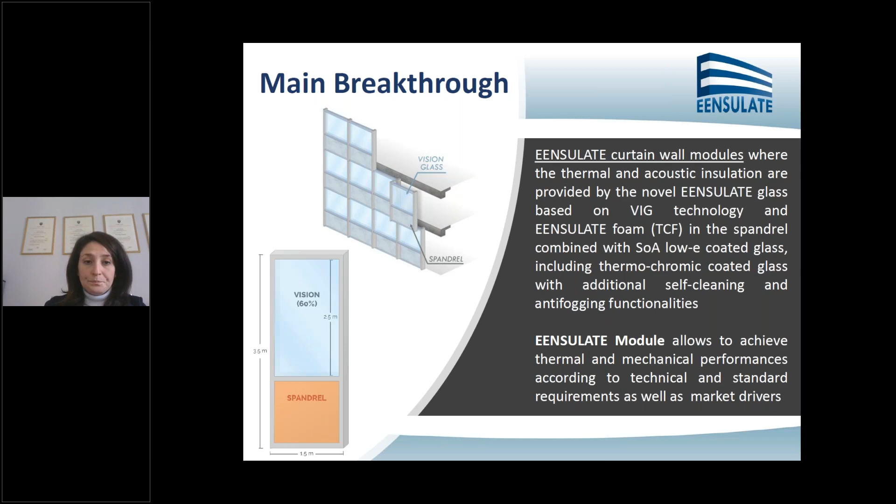Now I'm going to go a little bit more in detail concerning the technologies that we develop for producing the EENSULATE products. In particular, the vacuum insulated glass is a lightweight and thin double pane assembled thanks to the innovative sealant and getter technologies, for the transparent part of the facade, as well as for the windows application. In addition, for the spandrel part, we develop a highly insulated foam based on monocomponent and bicomponent elements.

Concerning the VIG, the vacuum insulated glasses have been developed by BGTEC, a company based in Poland, of course with the support of the rest of the consortium. BGTEC developed a tailored manufacturing process implementing both the innovative sealant and getter strips to ensure the target performances for the final product. That is a target U-value of around 0.36 to 0.44 watt per square meter Kelvin.

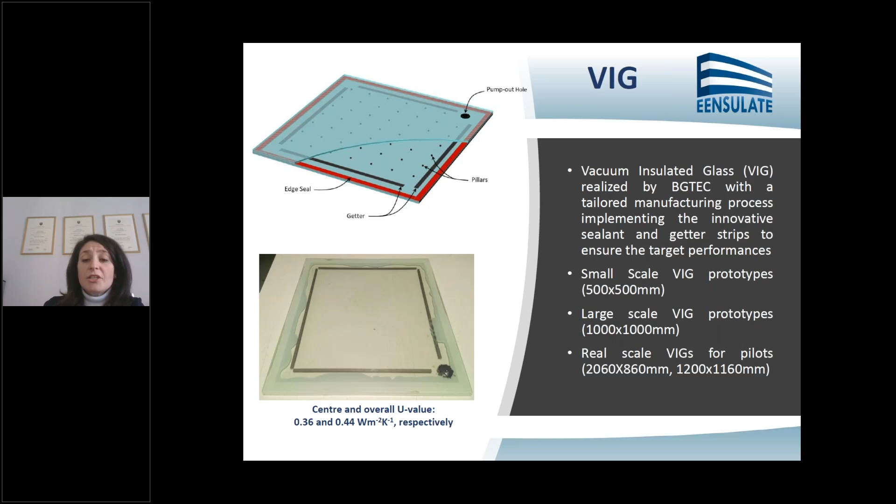During this project, we developed several small-scale VIG prototypes of 500 millimeters and also large-scale prototypes. Currently, BGTEC is assembling the latest real-scale VIG for the pilots' application.

Regarding the foam, the monocomponent foam is specifically for windows application and has a very high insulating target. And the two-component foam has a high fire class and it is tailored for spandrel application. Both of them have been developed by Selena, a partner of the EENSULATE project, and it is a Polish company. The innovative foams are based on polyurethane foams with tailored cell morphology, size and structure in order to enhance the thermal performances through the precise control of the cells' nucleation.

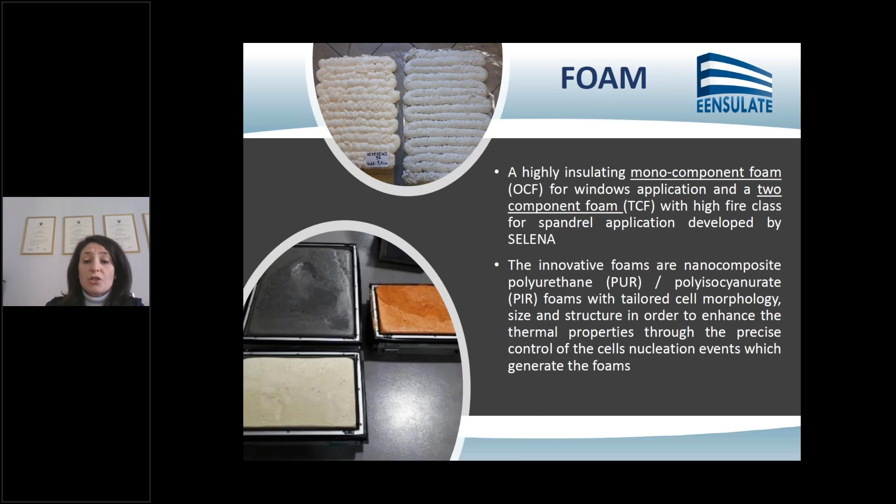Concerning the sealant, the sealant used for the assembly of the VIG system is an epoxy resin sealant, and the thermal curing allows a low process at a temperature below 200 degrees. We also have the possibility of having a monocomponent sealant resin in a syringe form, dispensable in a range of 60 to 100 degrees. The sealant has been developed by SAES, which is an Italian company.

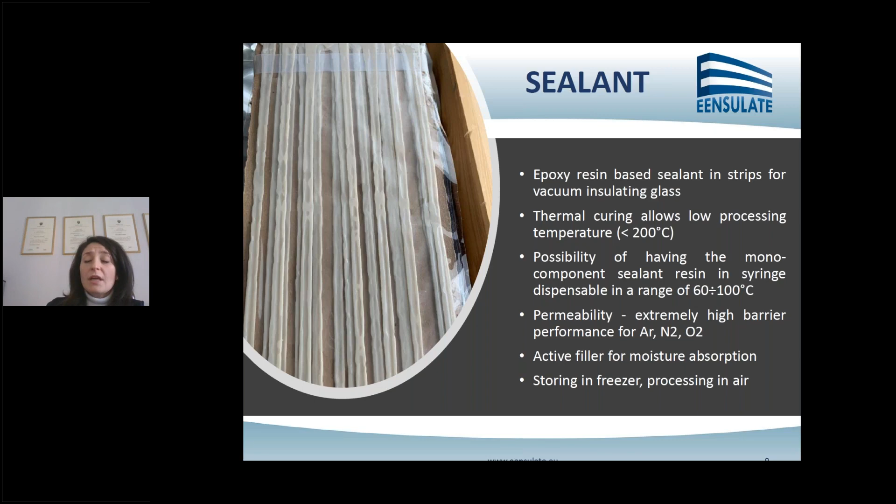This sealant has very high performance in terms of permeability, because it is an extremely high barrier for argon, nitrogen, and oxygen. It is necessary to store it in a freezer at very low temperature, but the processing can be performed in air.

Regarding the getter, it is a distributed getter realized with an innovative zirconium-based alloy with extremely high nitrogen capacity. It is very easy to be handled and positioned in air during the production process of the VIG. The getter activation is performed by radio frequency heating under vacuum pumping.

In this particular pilot, we will apply not only the VIG technology that we developed in the EENSULATE project, but also the TGU, traditional triple glazing units, in order to compare the current state of the art with the innovative solution through monitoring.

Concerning the museum, it is the second Polish pilot, based again in Dzierżoniów. It is a historical building, and for this reason we could not change all the windows, but we simply removed them and included the innovative VIG system in the same frame. This is possible simply because the VIG that we are developing is lightweight and very flexible for application in different kinds of configuration.

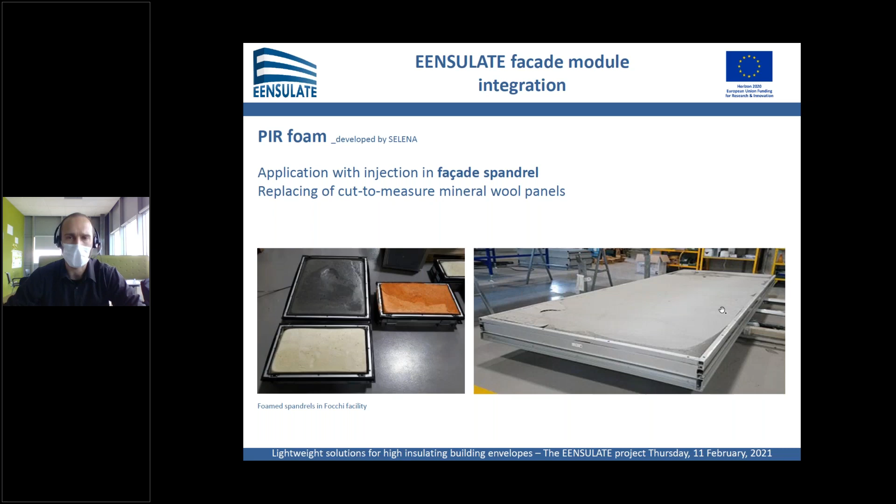Two technologies are crucial for the EENSULATE facade module. First of all, the foam. This is a PIR foam that should be applied inside the spandrel, so the opaque part of the facade, with the idea to replace the cut-to-measure mineral wool insulation that is usually used in curtain wall facades. This represented a first challenge for the project, to include this type of foam inside the spandrel. The results are interesting, and it opens some opportunities for its wider application in an industrial scenario. Some further development is obviously needed, as is normal for an innovative product, but it's a very good achievement.

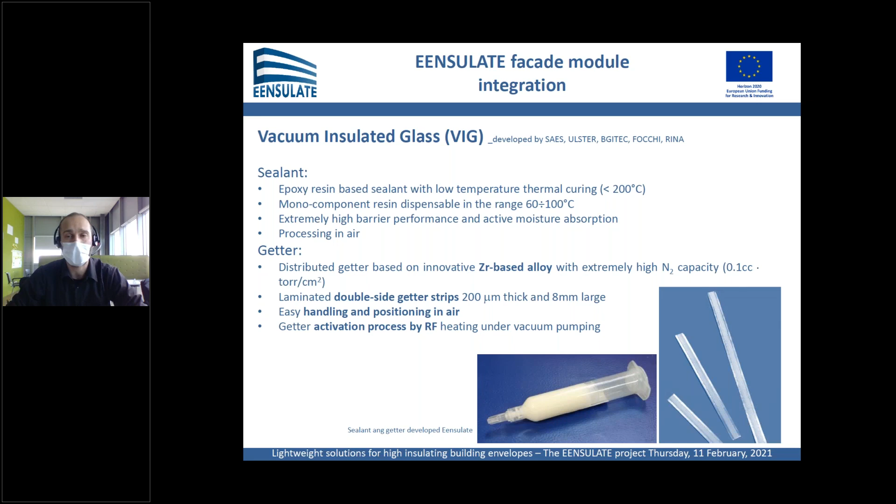The second technology is the vacuum insulated glass. As Daniela has already mentioned, it's quite innovative in the way the product is manufactured. In particular, the sealant, which can guarantee that the coating of the glass will not be damaged during the activation of the curing of the sealant. And second, the getter, the strip responsible for absorbing the air that eventually goes inside the cavity, and it achieved very good results, as we are seeing in the tests we are conducting at this very moment.

What are the final results of the VIG useful for the facade? First of all, the sealant is 2 times better than a commercial sealant for insulated glasses. It represents a very valuable moisture barrier for the glass itself, and allows the use of coatings for glass thanks to the low processing temperature. One of the main issues is how to cure this sealant while preserving the coatings that are now used for glass, and thanks to this sealant we achieved that result.

The getter, on the other side, allows for a very relevant improvement in relation to other getters on the market, achieving very high performance for the VIG in comparison to other VIG competitors, but also in comparison to one of the current benchmarks for the market, the triple glazed unit. And second and third point, we demonstrated how this glass could be laminated, so as to preserve safety for its application.

How did we integrate this solution? This was the target we wanted to achieve within the project: a new U value for the wall module of 0.7. It was designed specifically using one of the demo buildings that we expect to renovate during the project. As you can see, this is a unit of 1.2 meters by 3.6, and the overall target is quite relevant in relation to the current benchmark.

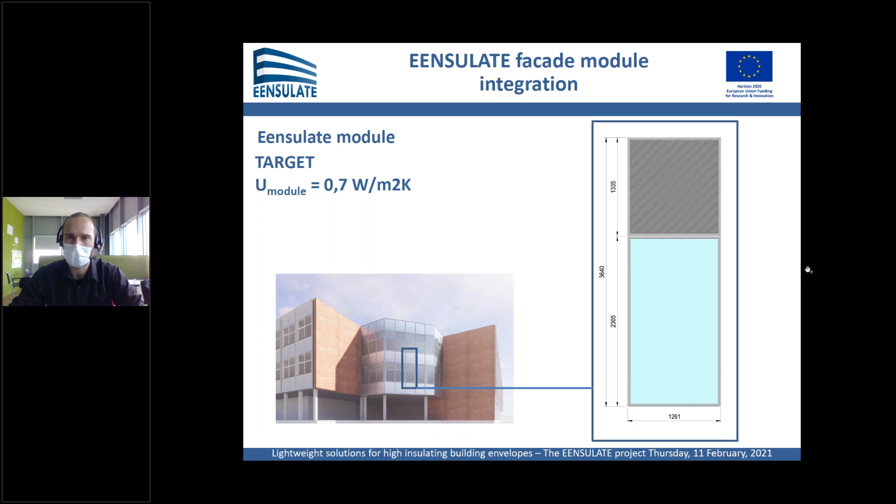What we've done: we have implemented during the whole project the integration of the VIG, trying to figure out the best solution to improve the facade design to integrate this component. In particular, one of the main issues was related to the VIG. The VIG was meant to achieve the target of 0.3 watts per square meter Kelvin for transmittance, and the foam 0.02 watts per meter Kelvin. The integration of the VIG strongly addressed the design of the profile for the facade, first of all because the sealant represents a thermal bridge for the vacuum insulated glass, so we tried to figure out which design could better achieve the result we expected for the module.

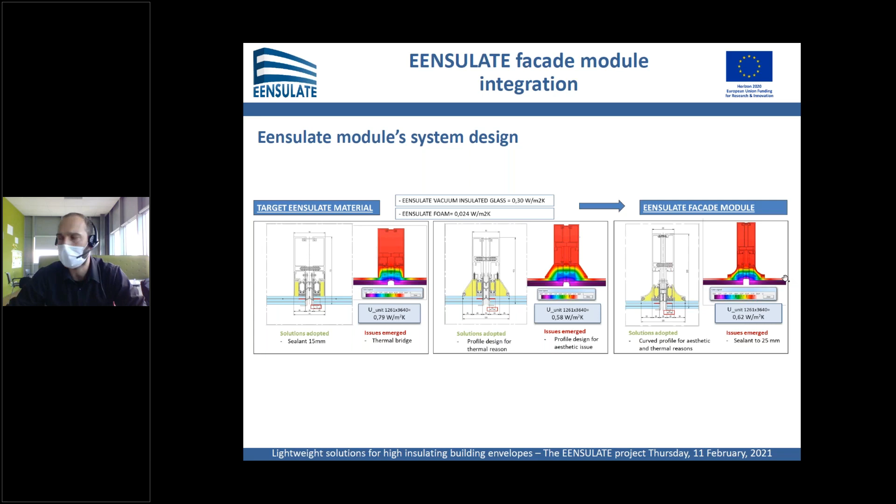The final configuration, and here you can see the implementation during the different design phases, allowed this type of solution. We finally had a sealant with 25 millimeters of thermal bridge. The getter is not relevant for the thermal bridge because it does not create any continuity between the two glass panes. We designed a curved profile to work with the isotherms of the thermal performance of the facade, and we filled this curved profile with EPS foam material to help reduce the thermal bridge, with a U value for the node of 3.1 watts per square meter Kelvin. The result is very relevant and perfectly in line with the expected target.

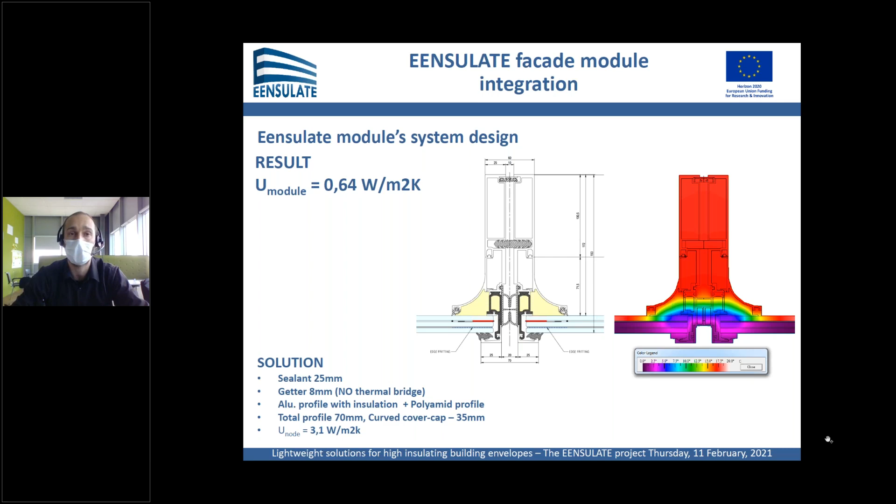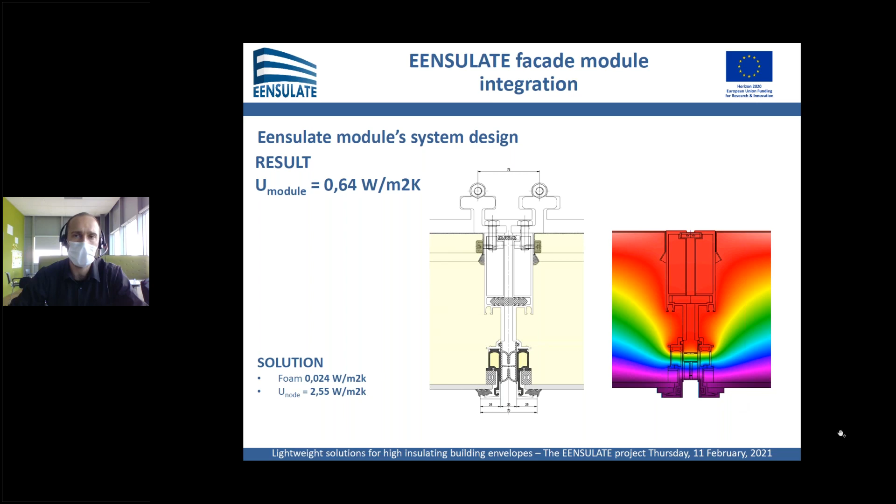So the U value for the vision part of the module was 0.64 watts per square meter Kelvin. The same considerations were adopted for the spandrel part, where we adopted the foam. The foam guarantees a very high performance in relation to mineral wool because the conductivity is better, and so this contributes to the achievement of the target of the module.

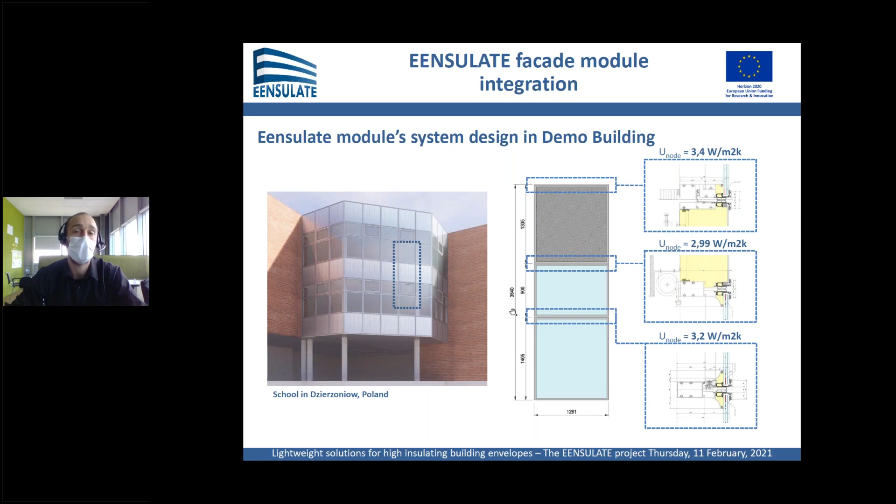We design specifically, as is typical for a curtain wall facade, the details of the facade, figuring out how everything fits perfectly in the final configuration, and finally we achieve the configuration of the facade itself. Here you can see the achievement specifically designed by Focchi within the project.

So you can see not only the profile, but also the technical solution we figured out to reduce the thermal bridge. In particular, you can see a thermal break in polyamide that is quite relevant because it absorbs all the thermal bridge caused by the sealant. And we apply, in this case, mechanical restraint for the vacuum insulated glass, due to the fact that we wanted to adopt something without utilization of structural silicone.

But the same facade system solution was also designed for structural silicone, so expecting to meet one of the main targets of current architectural design: try to decrease the mechanical restraint presence on the outside of the building.

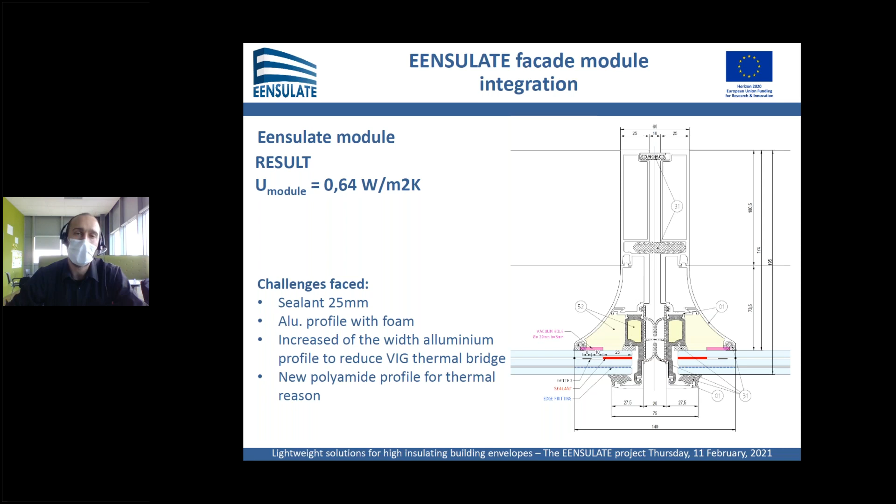Here's a comparison. On the left, you can see the EENSULATE facade module with the main components. So the vacuum insulated glass with the transmittance that is a target. We are perfectly in line. I can anticipate it, it's not part of this webinar, but the test demonstrated that we are in line with this target. Then the U value for the node and the transmittance for the unit.

Compare with the benchmark on the market. If we design something with a similar profile for the market, we would use a triple glazed unit and mineral wool. And as you can see, it's an improvement of the overall performance of the facade itself.

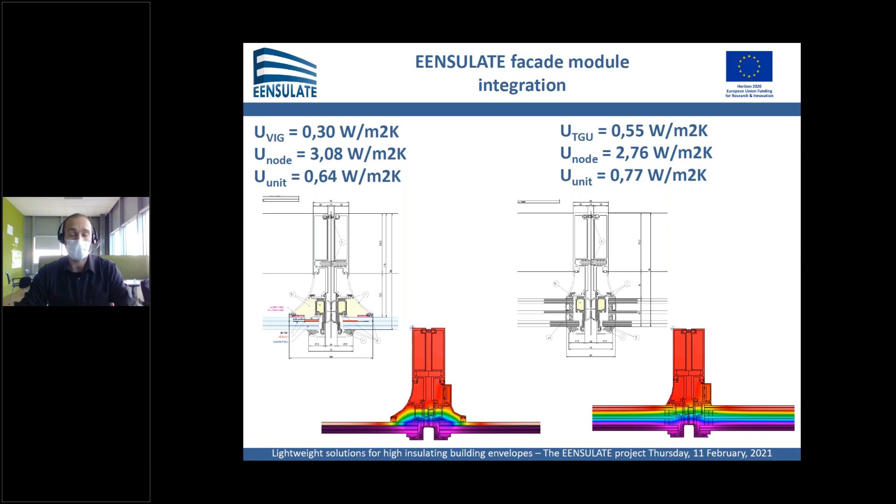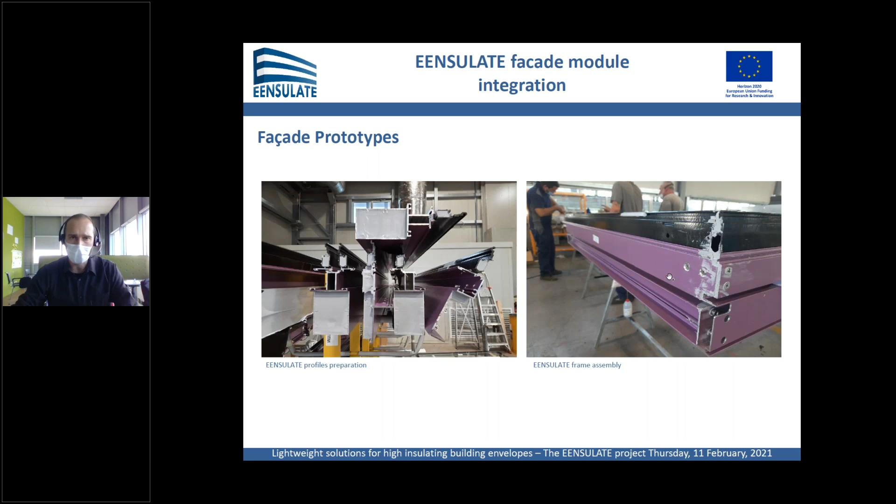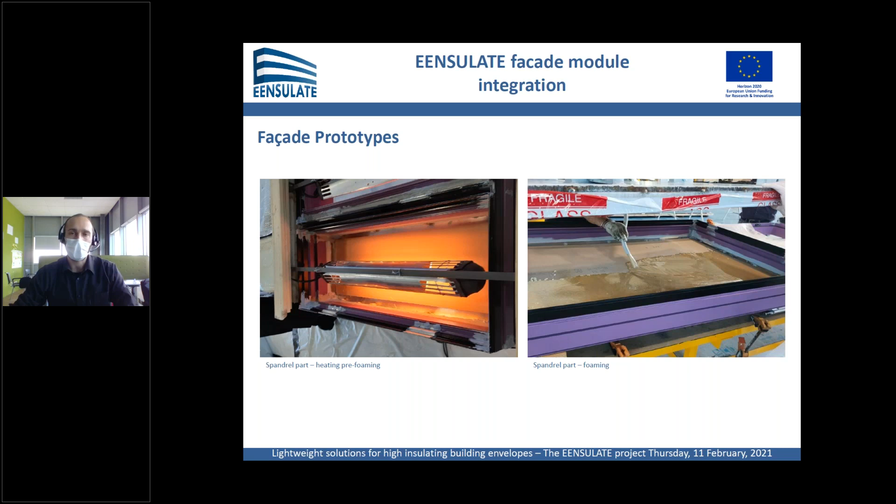The prototype phase: we prototype everything for the testing activities. So here you can find some aspects of the manufacturing. In particular, we tested how to pour the foam inside the spandrel. So a preheat was needed because the foam needed 50 degrees of temperature before the pouring. So all the procedures were tested and applied in the mock-up manufactured in our facility.

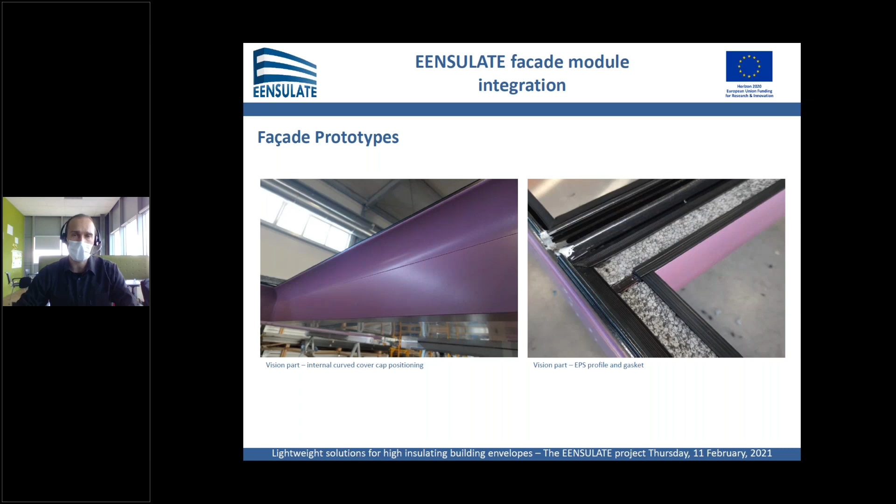Here the final result, as you can see, it's a good result that could support the consequent glazing of the spandrel part without any particular issue. Then for the vision part, here are some details about the curved profile and the foam inside the profile itself, and the glazing with VIG. As you can see, it can be managed easily using a suction cup without affecting the VIG itself, and then the unit closing with the mechanical restraint, and the final prototype ready to be tested for the different testing activities.

What are the tests we are now conducting? In these weeks, we expect to finalize 3 types of tests. The first is the performance mockup. So in a test chamber in accredited entity premises, the test conducted by this entity will test the facade in line with the norm, the 13830, to obtain the CE certification.

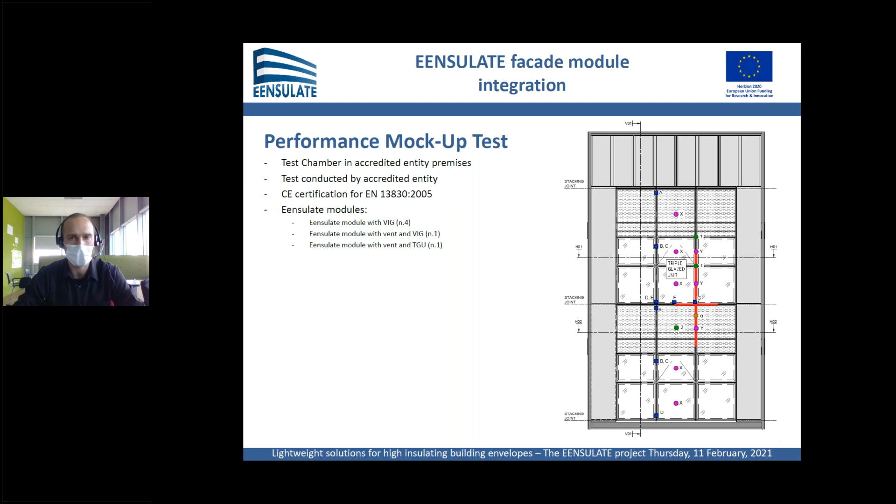And in particular in this test we'll validate everything around the facade. So first of all, the VIG performance in the vision part, but also in the vent we have installed, but as well we want to know if the system works in the case of benchmarks, so to use as a comparison, to see effectively what the differences are, if there are any.

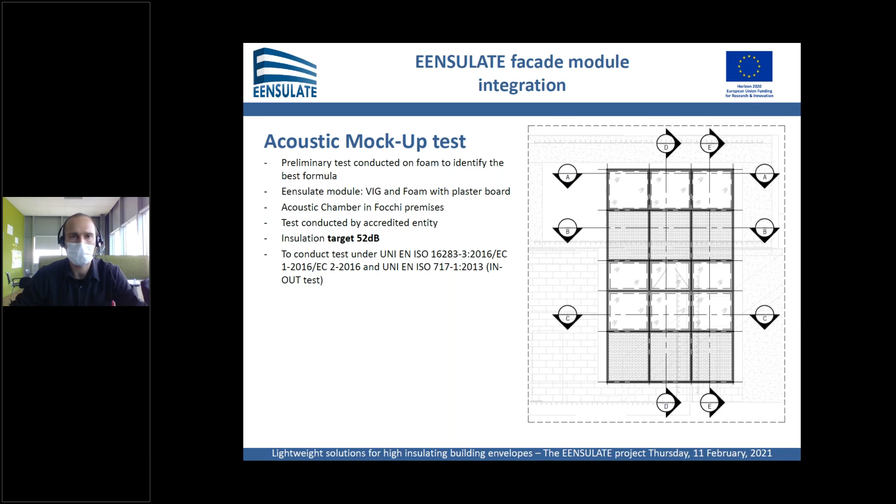The second test is the acoustic mockup. In this case, some preliminary tests have been conducted in the past years to validate the foam, and we introduced an additional plasterboard to meet the needed insulation of the spandrel. We test in an acoustic chamber here in our facility with the target to achieve 52 decibels of insulation, in line with the in-out test issued by the norm.

Last but not least, the test is the fire mockup. The fire mockup will allow us to compare the benchmark on the market, so a unit with TGU and mineral wool, with the EENSULATE module, so with VIG and foam, and to see effectively how they work, if they work differently, and what are the main differences.

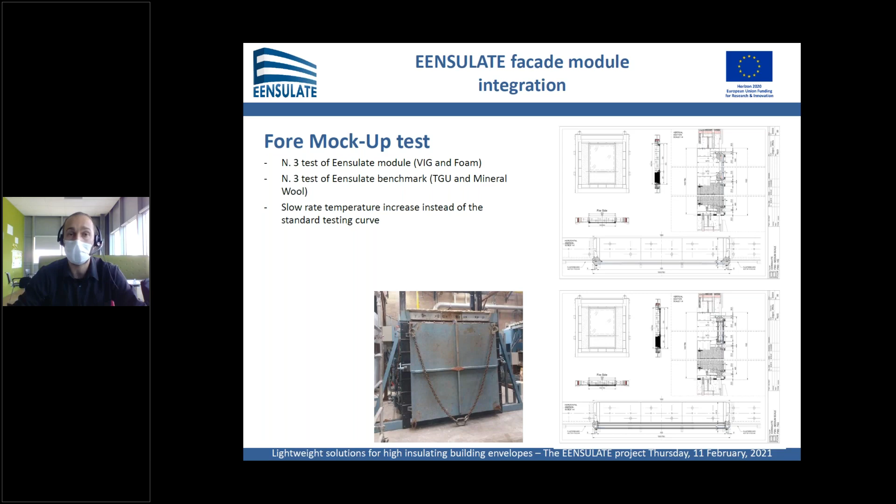We will not use the traditional temperature increase curve of the 13501 norm, for reasons related to glass, sealant, facade and so on, but we work on a slow rate temperature increase just to know effectively how it can work and see differences at different temperatures.

Some conclusions about the project. The EENSULATE technologies demonstrate that they can be integrated in a unitized facade, achieving a very high energy standard for the building envelope, working to improve the overall energy performance of the building, and also, quite particularly relevant, the reduction of facade weight, which means less glass, less materials, less embodied energy in the components of the facade itself.

The next step is the testing activities. So we aim to achieve the CE certification of the facade and to validate the acoustic insulation of the facade. There are some minor aesthetic issues to be managed, but that's something the team is working on.

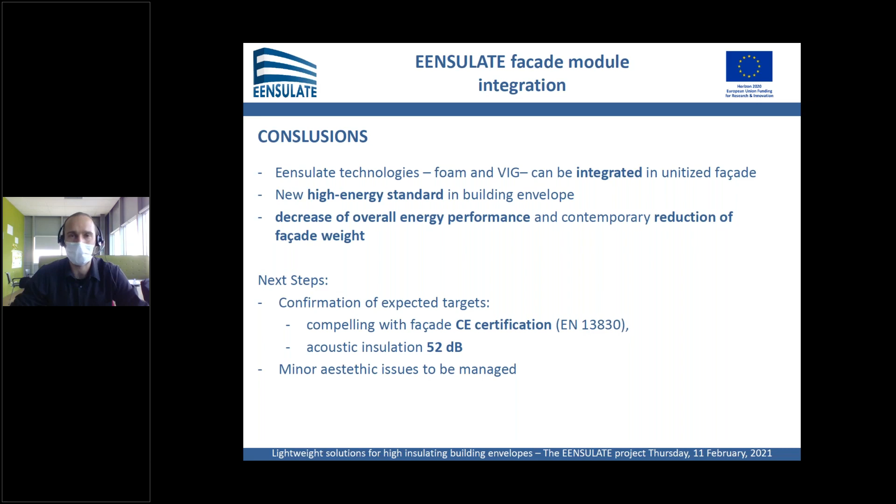Let's get another poll going regarding the technologies. So the question we have is, do you think that the project technologies, VIG, foam, and the facade panel, could be interesting for the building sector in your country?

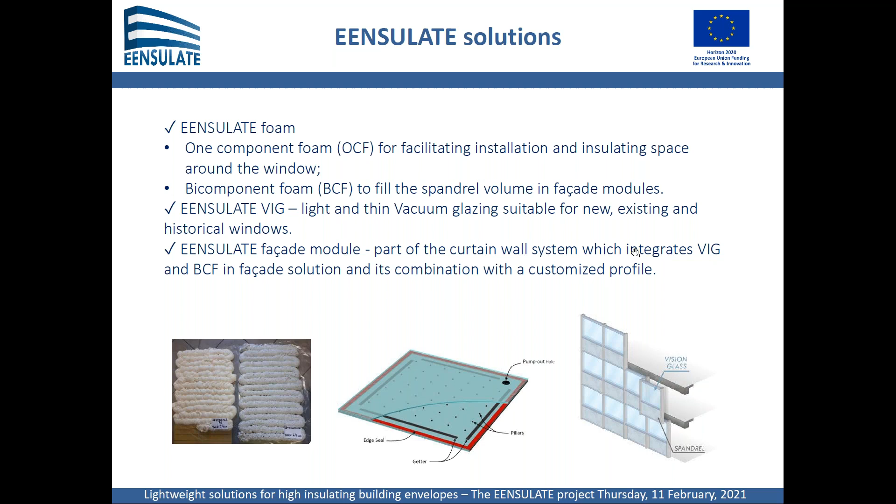Retrofitting scenarios were defined in order to demonstrate the wide applicability of EENSULATE components in different building retrofitting cases, and it can be applied for curtain wall facades. In this case, the EENSULATE module is used for the replacement of existing facades as a lightweight solution to reduce the weight of the structure and to increase its thermal performance. And the EENSULATE vacuum glass for substitution of the standard triple or double glazing units in existing facades.

In case of a new facade, after preparation of prefabricated modules in the factory, installation steps on site include standard procedures like dismounting of the existing facade, preparation of the surface, installation of the supporting system, then unit settling, taking into consideration all connections, sealing, and finishing. Next slide, please.

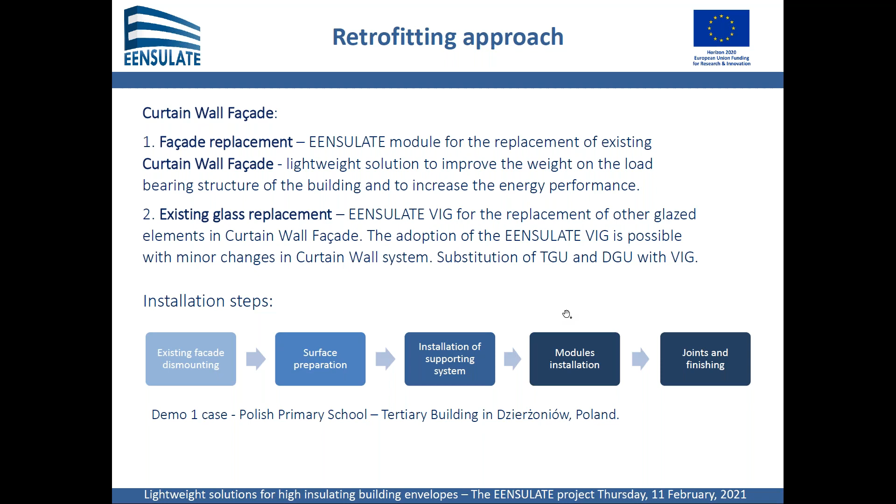And the second type of application, EENSULATE VIG for replacement of all single and standard double or triple glazing in existing windows for historical and contemporary windows and doors, with improvement of performance without affecting the overall view. Works are restricted to substitution of existing glazing with vacuum ones only, by window sash dismounting. It's a renovation and vacuum glass insertion, and if necessary, renovation of the frame, then window assembly and sealing. To facilitate and accelerate the installation process, application guidelines were developed within the project before the planned intervention. Next slide, please. Oh, sorry.

Different project demo buildings have been selected to demonstrate EENSULATE products' adaptability in different retrofitting building cases. Solutions developed within the project and presented before have been installed on 3 demonstration buildings representing different types. A school in Poland where EENSULATE facade modules with triple glazing and vacuum glass have been installed. Then a museum and library where existing glazing is substituted with vacuum insulated glass.

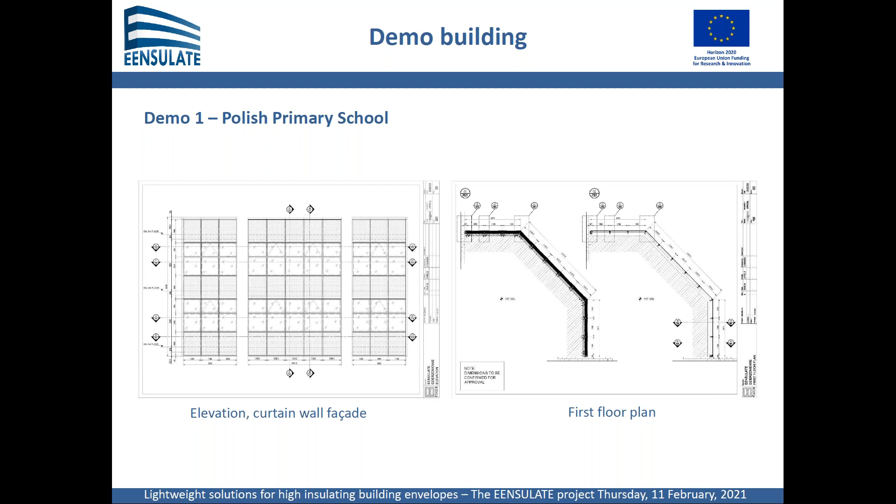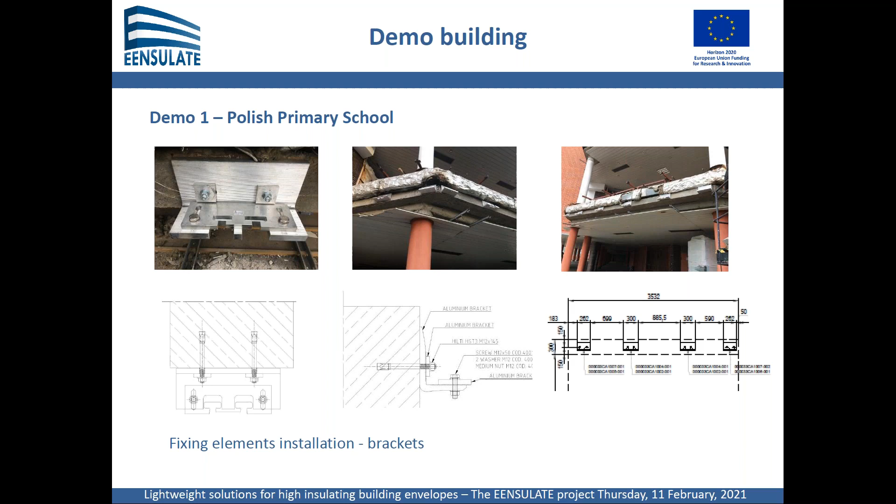The first action was dismounting of the existing aluminium facade, as shown on the photo. Then the installation process of the insulated facade system was similar to the installation procedure used for traditional facade retrofitting. The main steps were site preparation and fixing of supporting elements for facade module installation, and proper positioning of anchors located on the front of the floor slabs is crucial for undisturbed unit mounting.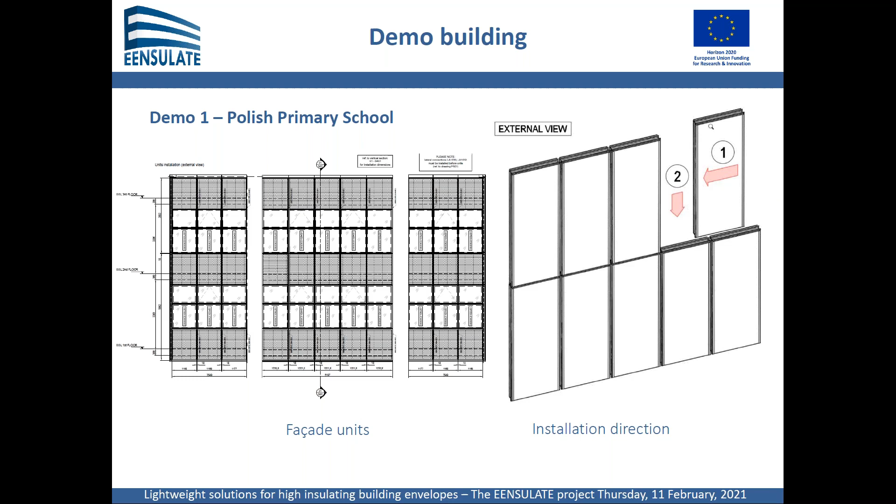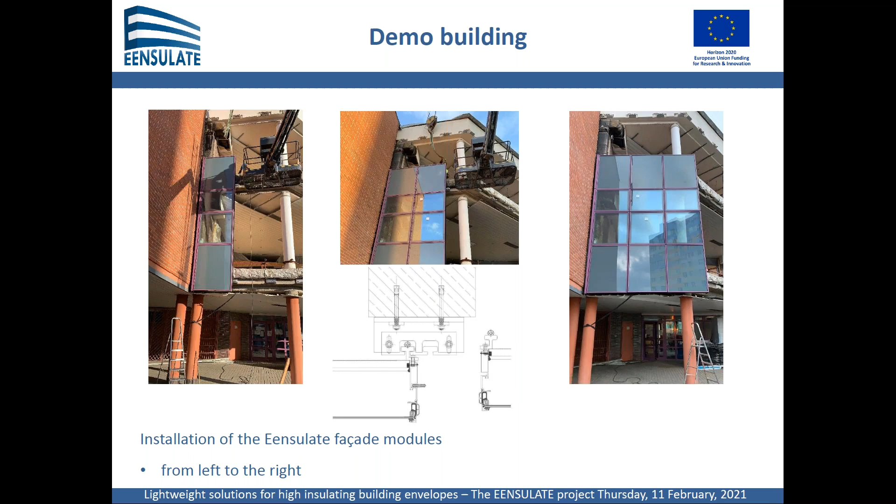The next step is to settle the facade modules into the position marked on the drawings and secure them to the building. In this case, the works were conducted from outside. Units were lifted by means of a crane from the storage place on the ground near the building, and directed by the staff to be installed to anchors fixed on the slabs. Installation proceeded from left to right and from bottom to top.

Additional components like gaskets, sealing, and joints should be properly applied for preserving the impermeability of the facade wall. On the slides, particular steps from installation are presented. And the new facade after intervention: it can be noticed, comparing pictures before and after installation, that the shape, divisions, and facade colors are almost the same.

The second demo is a historical city museum building from 1897. Today the museum hosts exhibitions concerning the city and surrounding area. Being a historical building, the museum has restrictions regarding modification of elements of its construction, and it was requested that the new windows' appearance be exactly the same as the existing ones. Thanks to the insulated vacuum glass, it's possible to substitute the existing poorly performing old glass with better performing glazing, keeping the same construction of the windows, thanks to the thinness and light weight of the new glass.

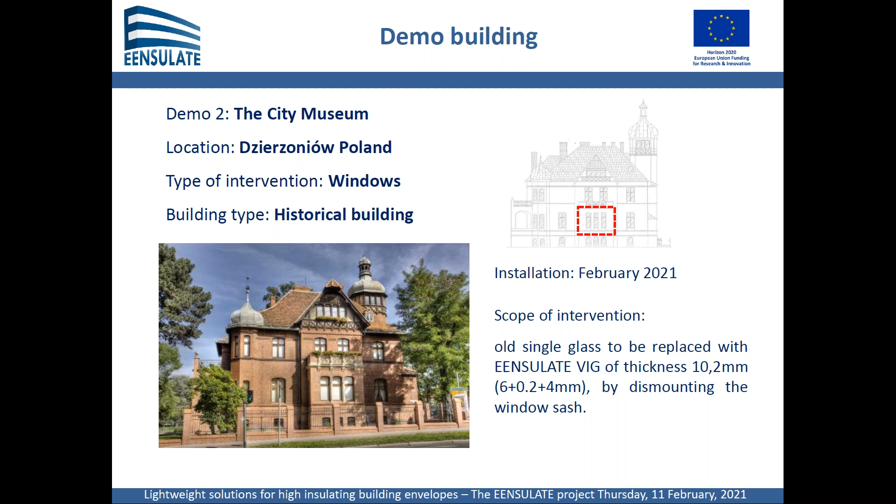The existing windows are old box windows with double sashes opening to the inside, filled with single glass. Here are photos presenting the inside and outside view. The window sash has been carefully removed in order to perform necessary renovation works, and then the single glass will be replaced by VIG, and the same element will be installed into the existing frame. Works are still ongoing, and the sash is uninstalled, currently under renovation in the company facility. Vacuum glass fabrication is almost finished, and installation is planned in the next weeks.

In the case of historical buildings, restorers usually are not willing to give permits for intervention that exceeds necessary works. For this reason, it usually has to be reduced to a minimum. But thanks to vacuum glass, there is no need to replace existing old windows, keeping the same appearance while increasing glass thermal performance and giving the possibility of adopting the solutions in this demanding type of building.

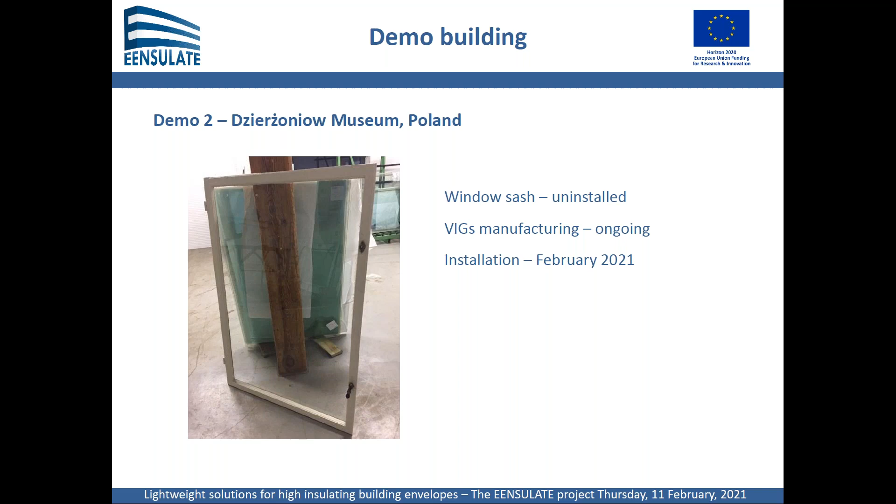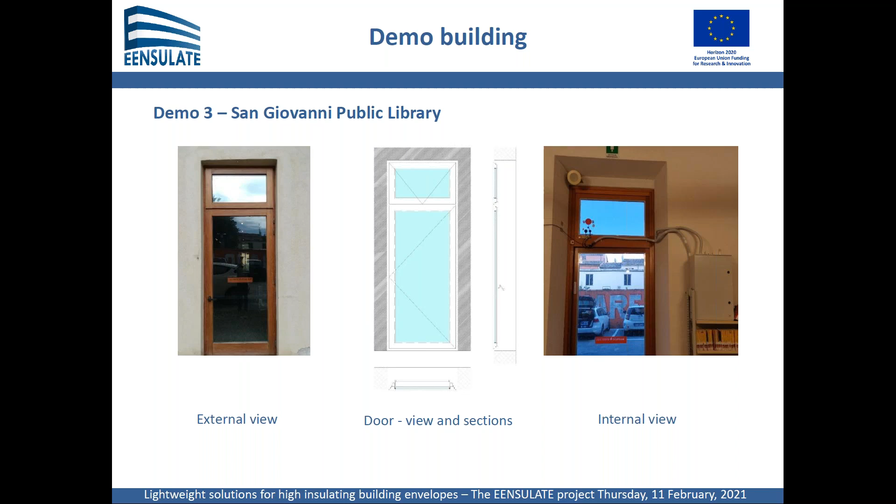The third demo pilot subjected to EENSULATE retrofitting is the San Giovanni Public Library, located in Pesaro in Italy. It's a historical building renovated in 2000 with many contemporary elements. In this case, the retrofitting includes EENSULATE VIG utilization, replacing the existing double glazing in the wooden door frame without affecting the aesthetic of the building. After installation activities, the solutions are currently under validation in the monitoring phase. In order to investigate the performance of the VIG modules, the building will be monitored in regards to thermal and optical behavior, but also indoor comfort, to compare vacuum glass and the existing ones.

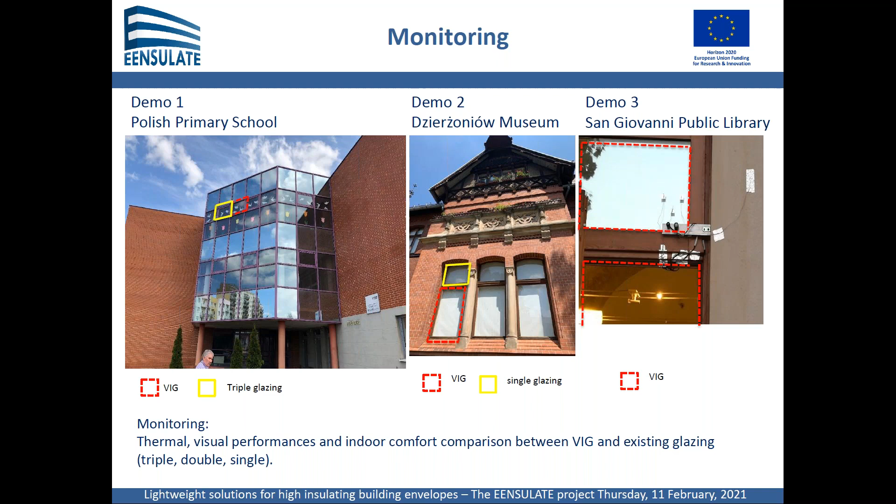As a summary, the main advantages of VIG units, besides improved performance, taking into consideration the installation process, are low weight: triple glazing of 30 kilos versus vacuum of 20 kilos with improved parameters. Then thin construction: 12 millimeters versus a 36 millimeter package for triple glazing, which leads to reduced window and facade profile construction, and facilitated logistics due to the weight and space necessary during transport and storage, but also during installation. And also the possibility to improve indoor comfort and thermal performance, also in retrofitting of such demanding buildings as historical ones.

For manufacturing of the vacuum glass, tempered panes are used, and it is also possible to laminate the external panes, which is important for installation at height for safety reasons, in order to avoid falling risk in case of breakage.